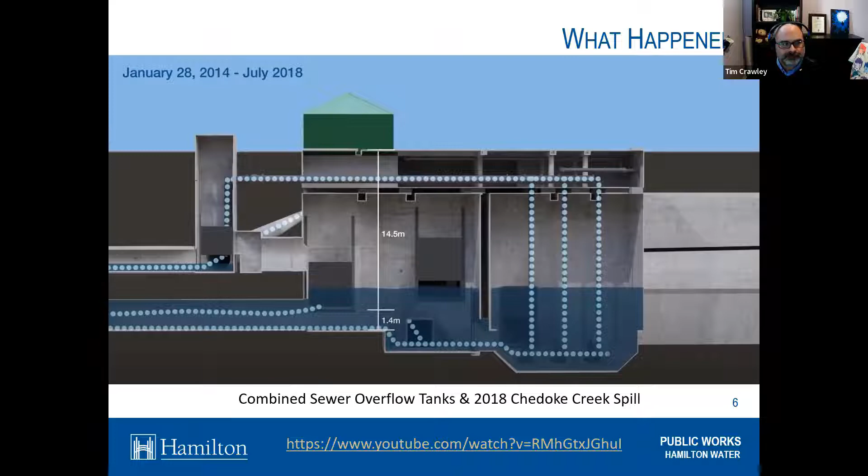So what happened? If you search combined sewer overflow tank in the 2018 Chedoke Creek spill on YouTube, you'll find a great 12-minute video. It explains a lot, especially how a combined sewer overflow works and what happened. For those interested, we encourage you to watch the video in its entirety. For now, we want to show you a portion of it for some context on the upcoming slides.

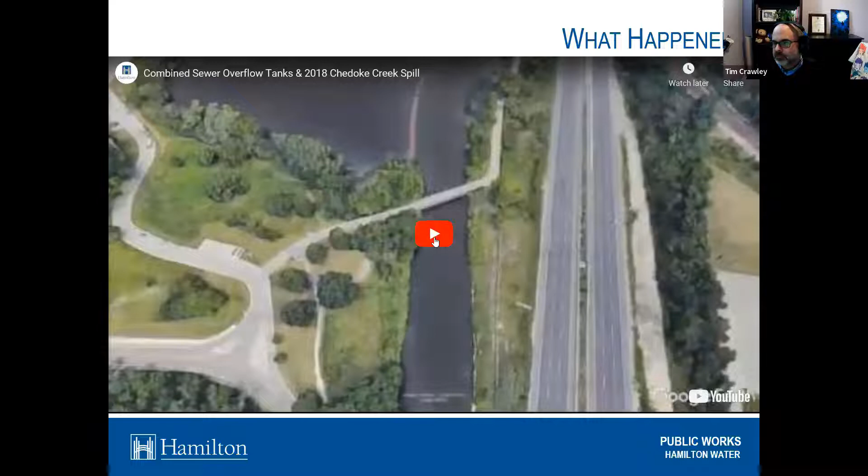In July 2018, the City of Hamilton informed the public that we had discovered that the Main King CSO tank was discharging untreated wastewater into Chedoke Creek. At the time of this public notification, the duration and volume of the spill were unknown. We immediately stopped the discharge and began cleanup activities in the area.

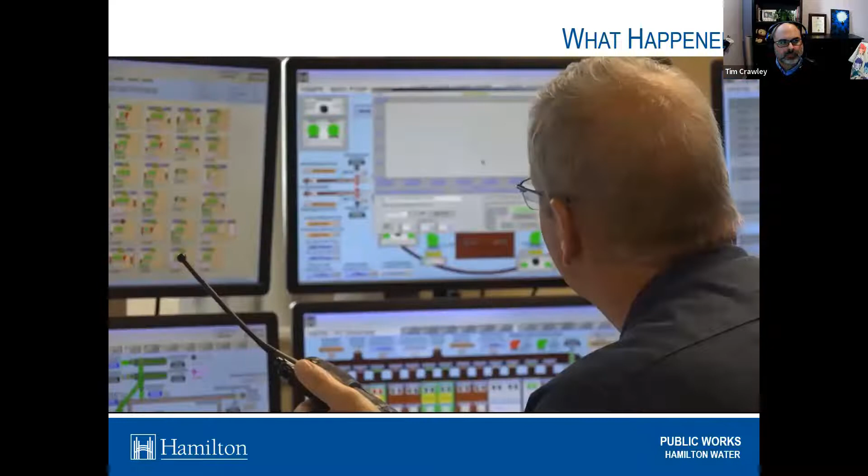Since discovering the spill in July 2018, we have been working with the Ministry of the Environment, Conservation and Parks to investigate the incident. As this investigation was ongoing, the city had not previously shared detailed information about the spill. However, this video includes a brief summary of what staff currently believe are the circumstances that led to the discharge. Investigations have determined that the spill was a result of two separate malfunctions at the Main King CSO tank.

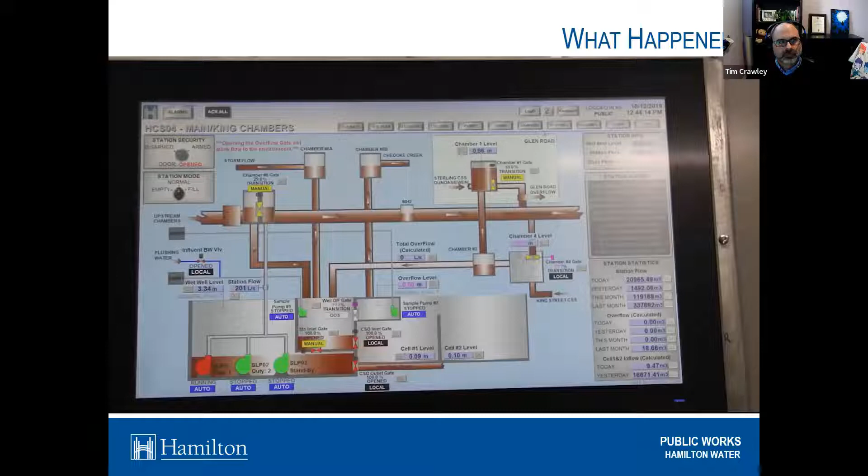First, a station bypass gate in the tank that should have been in the closed position appears to have been manually opened to approximately 5% on January 28, 2014. An error in computer programming showed this as normal operation, and as such, this error remained undetected until July 2018. This gate is approximately 14.5 meters below ground.

Its purpose is to isolate wastewater flow in order for the tank to be taken offline to perform major repairs. The gate itself sits 1.4 meters above the bottom of the channel where wastewater enters the Main King CSO tank. Wastewater flow would have generally stayed below the open gate. However, at times wastewater passed through the partially open gate and out into the creek. Despite extensive investigations, the city has not been able to determine why the gate had been opened in January 2014.

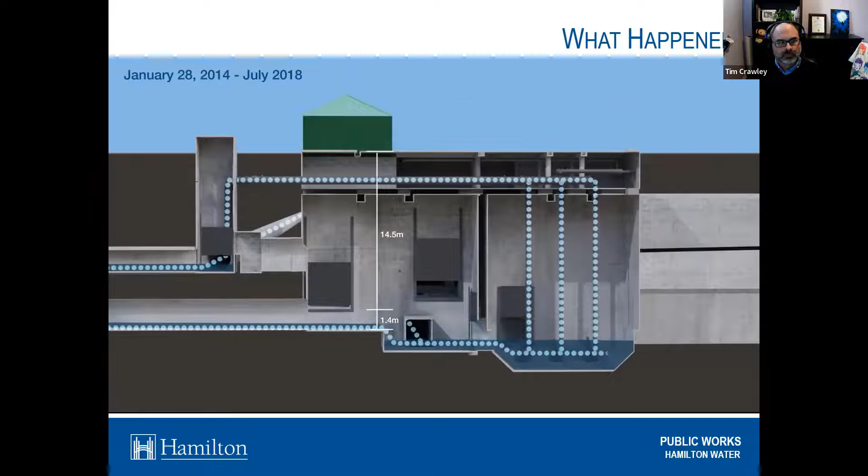A second gate that should have remained in the open position during normal operation experienced a mechanical failure in January 2018. This was also discovered by the city in July 2018. The sensor on this piece of equipment did not detect the mechanical failure and was reporting normal operation. This gate moves vertically up and down on a stem, and the sensor for it is attached to the mechanism that raises it up and down.

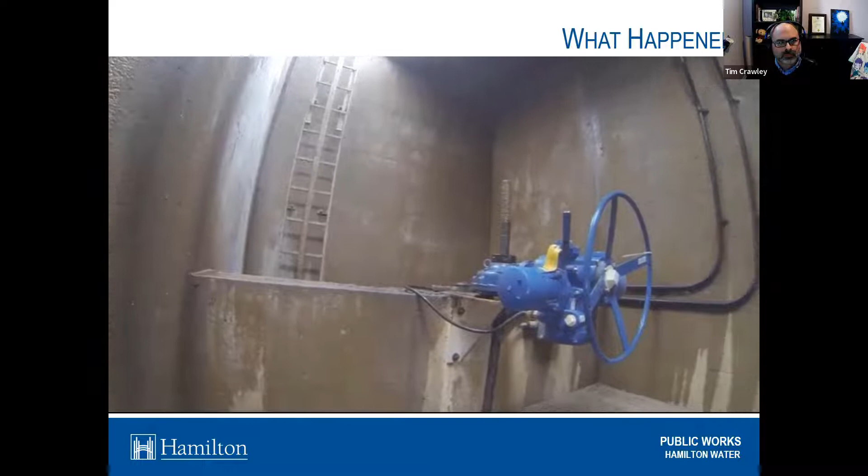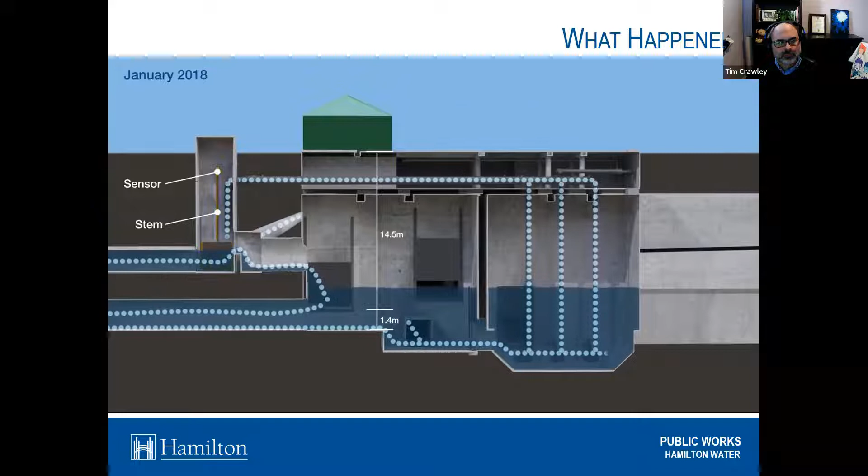As a result of the mechanical failure, the gate became separated from the stem and remained in the closed position. However, since the mechanism with the sensor was still moving, it was reporting normal operation. This second failure allowed significantly more wastewater into Chedoke Creek, creating odors and reports of visual floatables in the creek.

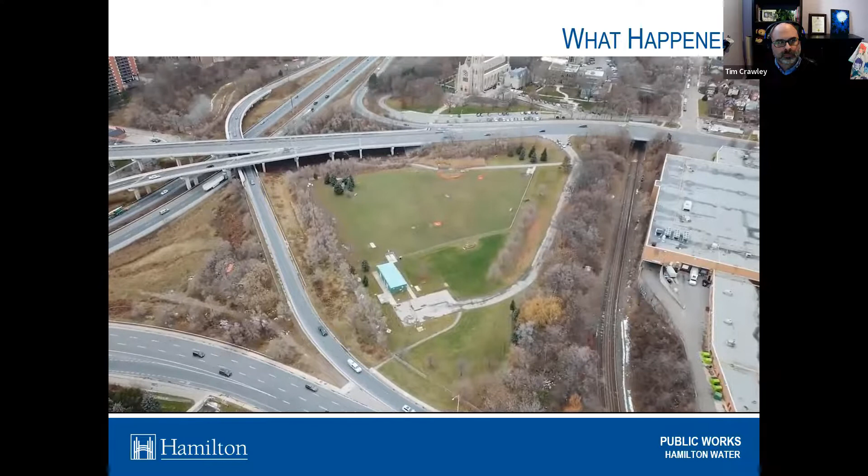As part of the investigation, the city has completed computer modeling exercises to estimate the amount of wastewater that was released into the creek. It was estimated that approximately 24 billion liters of stormwater and sanitary sewage was discharged over the course of 4.5 years.

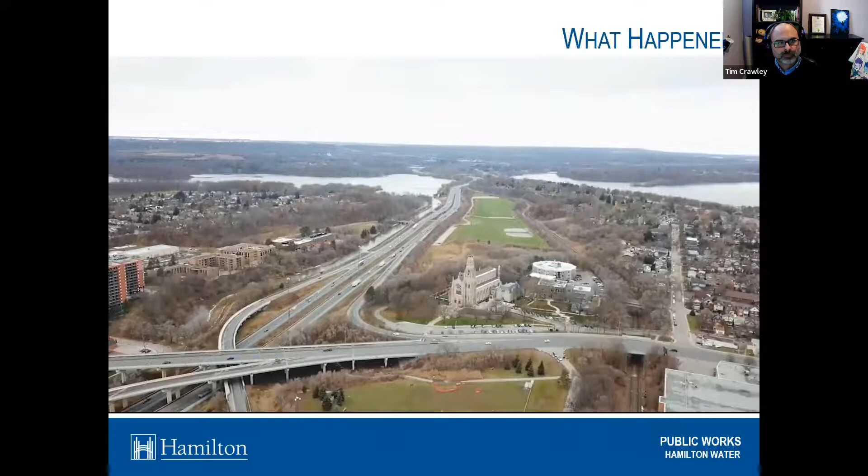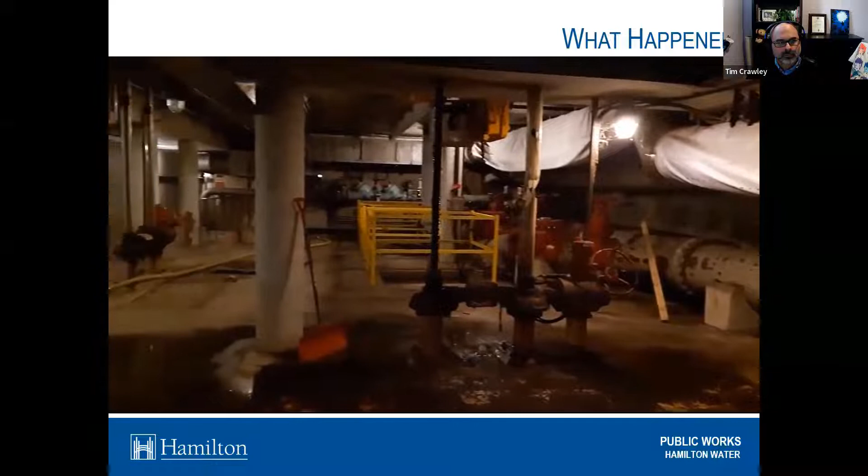Unfortunately, our investigation to date has not been able to pinpoint the cause of the malfunction with certainty. However, we are taking steps to ensure we are able to reduce the risk of spills like this from happening again by reviewing our procedures and improving on-site inspections of our CSO and other wastewater facilities. As stewards of the environment, we take spills very seriously and are committed to protecting our natural resources.

At this time, the city is continuing to work with the Ministry of the Environment, Conservation and Parks in their investigation. There is no evidence of any human health effects identified as resulting from this spill. The city discovered the source of the spill on July 18, 2018. There was no knowledge of the spill at any time prior to July 2018.

Within only a few weeks of locating and stopping the discharge, water quality sampling results showed a substantial improvement in water quality conditions, associated with a dramatic decrease in E. coli to pre-spill levels. For many years, Public Health Services continues to recommend against using the watercourses linked to Chedoke Creek for primary contact recreational water activities, such as swimming or wading, or secondary contact recreational water activities, such as canoeing or fishing. As such, signs warning against any contact with those waterways are expected to remain in place indefinitely.

The spill had no impact on the drinking water supply in Hamilton, as Lake Ontario is the source of our drinking water.

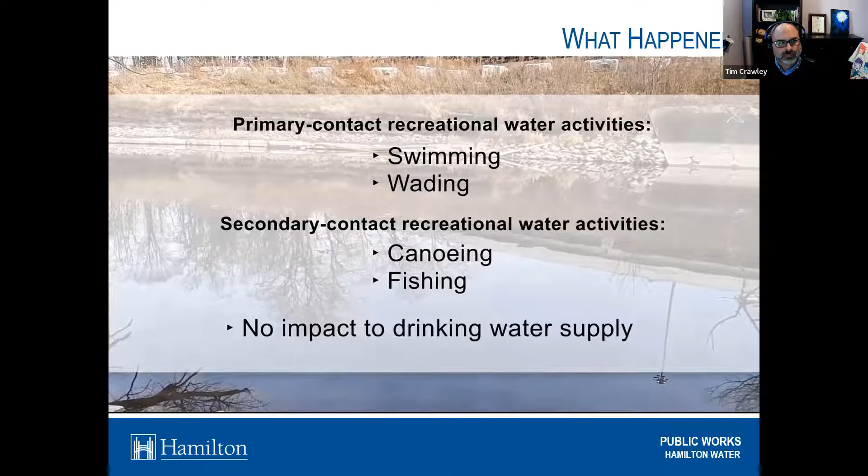So up next are the city actions from the discovery up until the beginning of 2021. This includes operational, procedural, and physical changes that were done.

The first of which is the bypass gate was physically sealed, preventing any accidental operation and eliminating any unintended discharge. The second gate and stem sensor was also reconnected, and site inspections at all the combined sewer overflow facilities have also been completed with no similar issues identified.

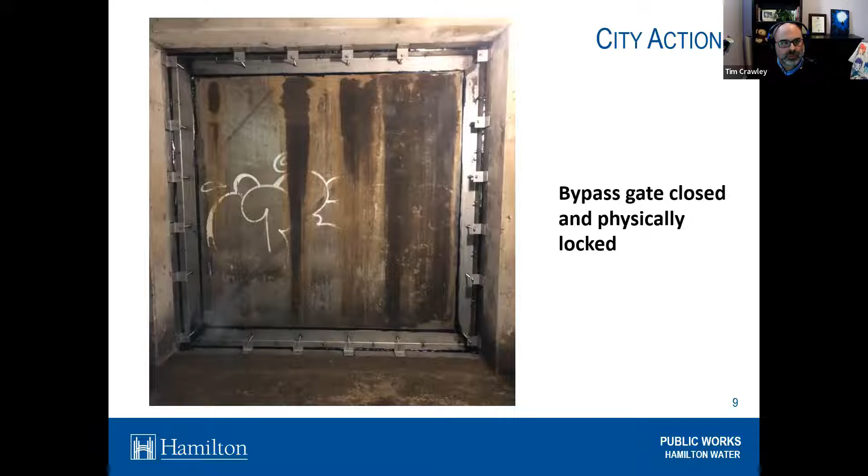The surface of the creek was also cleaned. A boom is also installed annually from April to November to collect any floatables, not just from the CSO overflow, but from upstream creek inputs as well.

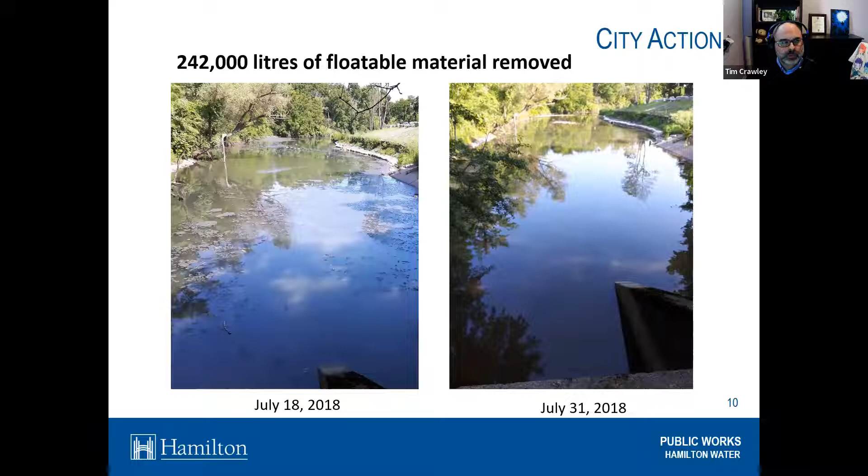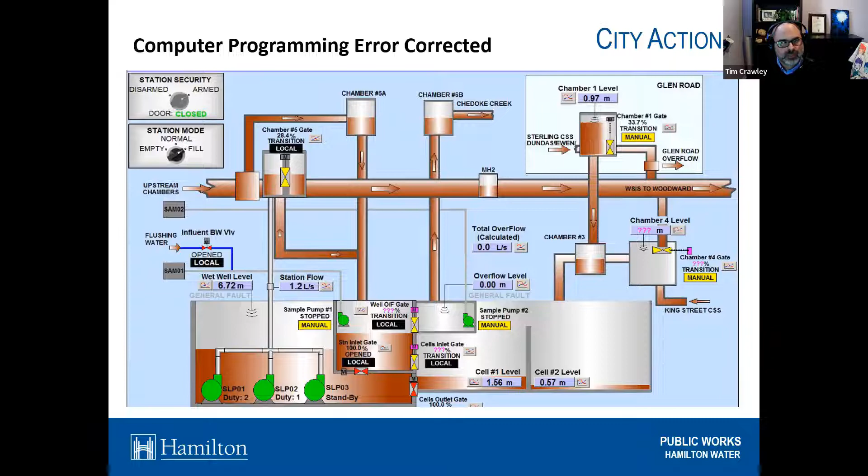The error in computer programming was fixed. This is a screenshot of what the operator sees on their computer screens. You can see the pumps and the valves and the transmitters. And this is an example of an error message that they would get, or a pop-up warning them that something's awry.

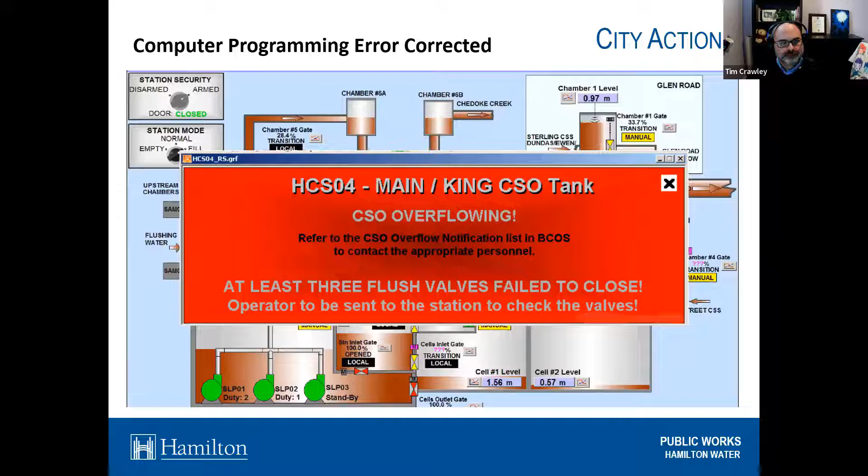We also created an enhanced City of Hamilton outstation team. This team is made up of an operator, electrician, instrumentation tech, millwright, and they perform inspections and look at the station as a whole to verify its operational functionality. This includes a detailed review of the electrical, mechanical, instrumentation, controls documents, which we'll get to shortly, and computer programming.

We also updated our controls documents and enhanced operator training. So controls documents, if you're not familiar, is really a document that describes how the CSO facility or tank works in a written format, and it's very important for training new staff.

We also developed and rolled out our wastewater quality management system. So having records and logs and annual reports adds to better management and is the key component to our continuous improvement. And it supports the environmental, health, and safety compliance culture within Hamilton Water.

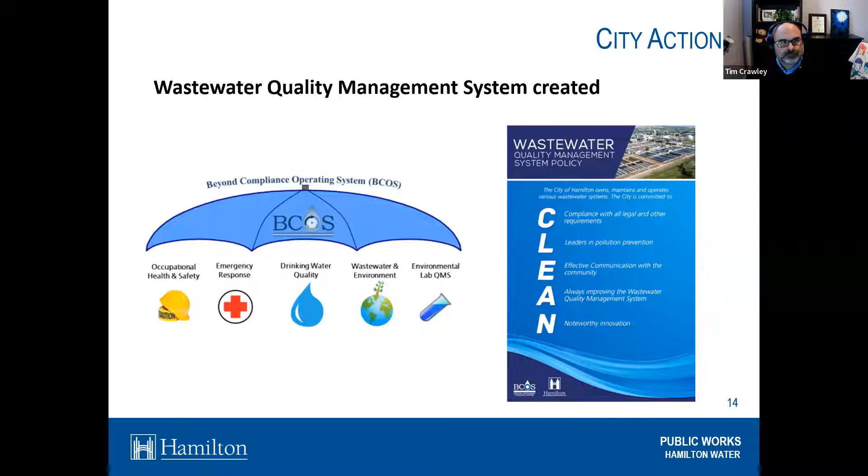The wastewater overflows and bypasses monitoring website was also created. It's a live map updated every 15 minutes, providing current information for each monitored outfall. It also includes historic records as well.

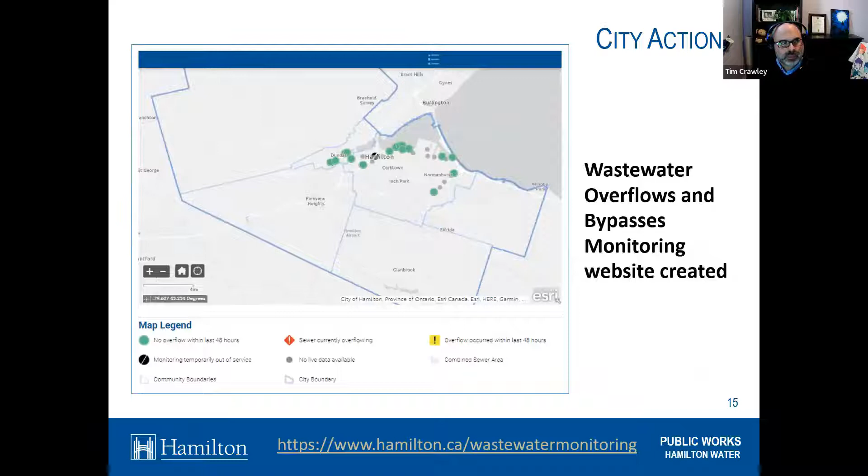And we developed a surface water quality program that samples surface water locations monthly throughout the city. The purpose of this program is to work with internal and external stakeholders to develop and monitor baseline surface water quality conditions. The information is provided through the Open Hamilton data portal for monitoring, trending, and research purposes. A list of all the physical and chemical parameters tested are indicated on the website below.

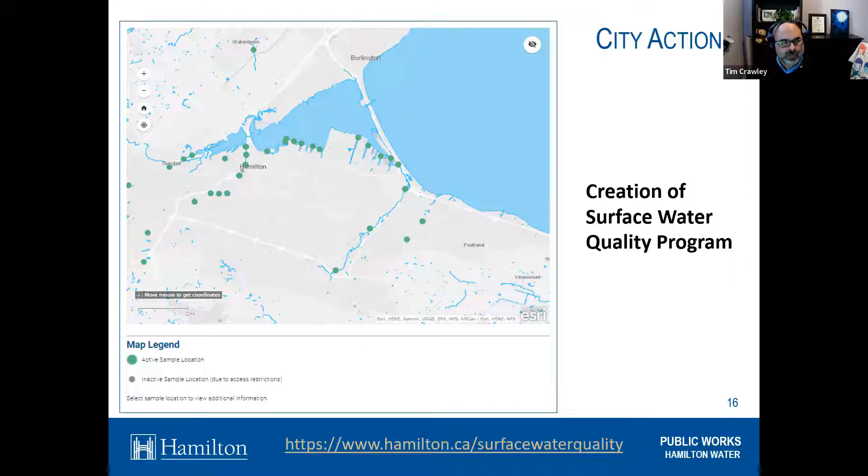In addition to all those actions, the city also initiated the Chedoke Creek Water Quality Framework Study. This study involved a high-level screening and prioritization of the available options for the Chedoke Creek watershed. This involves either capital, operational and maintenance costs, or programs that can be enhanced, and potential policies that can either be adapted to help the quantity and quality improvements within the watershed.

Established an overall plan for water quality, and it's developed through the participation of these external stakeholders. Since the initiation of the study came before the current MECP order, certain projects identified in this study were used to address requirements within the order.

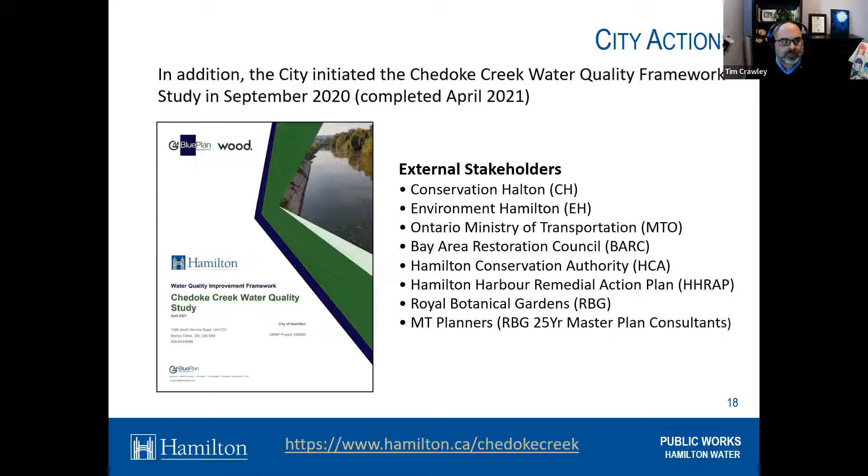So speaking of which, this brings us to the main focus of today's presentation, which is the current MECP order issued to the city in December of 2020. In the following slides, we'll be reviewing what has been done since the order was issued and the next steps.

So the objective of the order is to improve Chedoke Creek and provide offsetting remediation mitigation measures to account for environmental impacts that may not be addressed by dredging alone.

While working through the order requirements, the project team evaluated and received permitting approvals from the Hamilton Conservation Authority and the Royal Botanical Gardens to install a small-scale aeration system within Chedoke Creek, upstream of the Kay Drage Park Bridge, and 800 square feet of floating treatment wetlands within Princess Point.

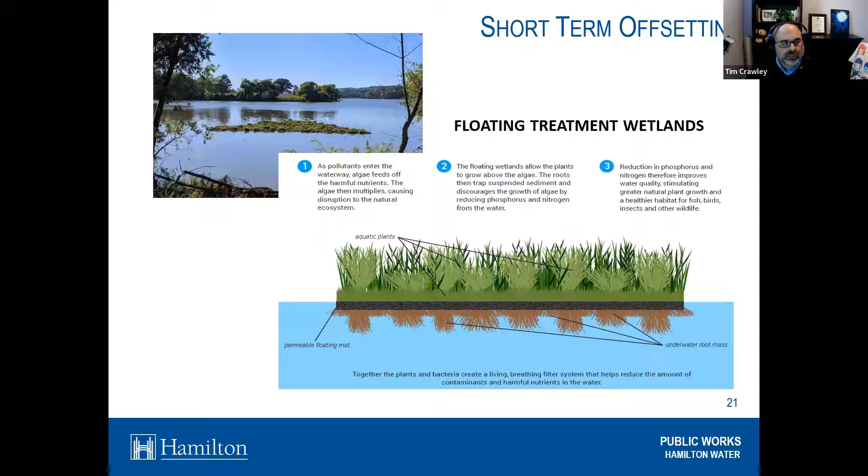Both small offsetting projects are pilots, or small tests, to learn more about any operational and maintenance requirements and explore the benefits each one has to offer, and not really exclusively to solve any specific issue at this moment in time.

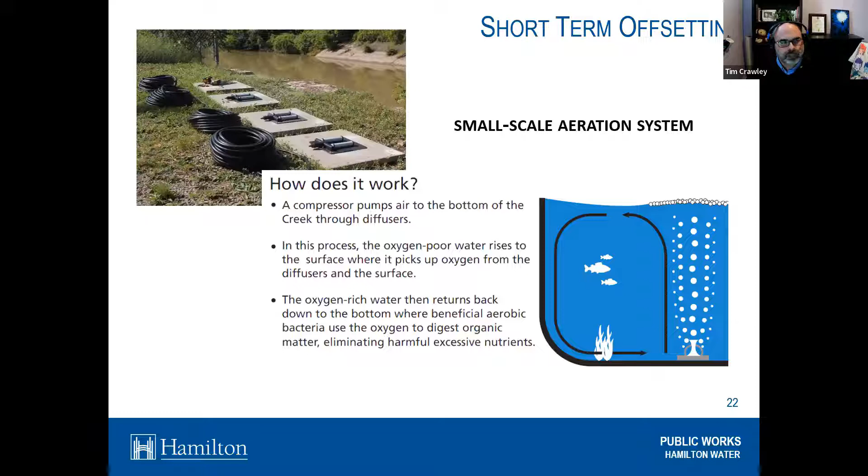Due to the fish species identified in Chedoke Creek, in-water work is prohibited from March 15th to July 15th each year. The project is expected to take 4 to 5 months to complete, and most of the permitting applications required to do this in-water targeted dredging work required at least a 90% design package to be completed.

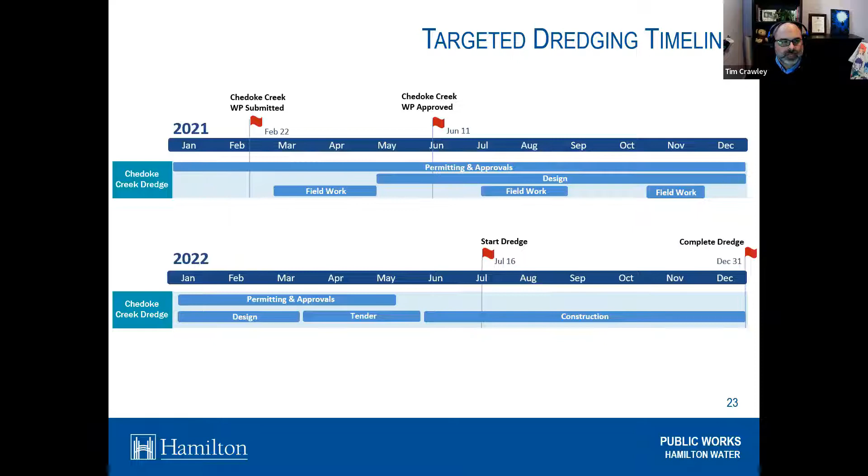This was needed in order for those agencies to have sufficient project detail to assess their permitting requirements and to either approve or deny the permitting. In order to complete that 90% design package, field work and desktop analysis was completed, which is presented on the following slides.

The first of which is sediment sampling and bathymetry. This involves collecting and updating information on the total soft sediment that is required for design and permitting. The bathymetry looks at the total water depth, so the top of the water to the top of the sediment. The sediment samples collected were analyzed for a variety of chemical and physical properties, including ammonia, nitrogen, and phosphorus.

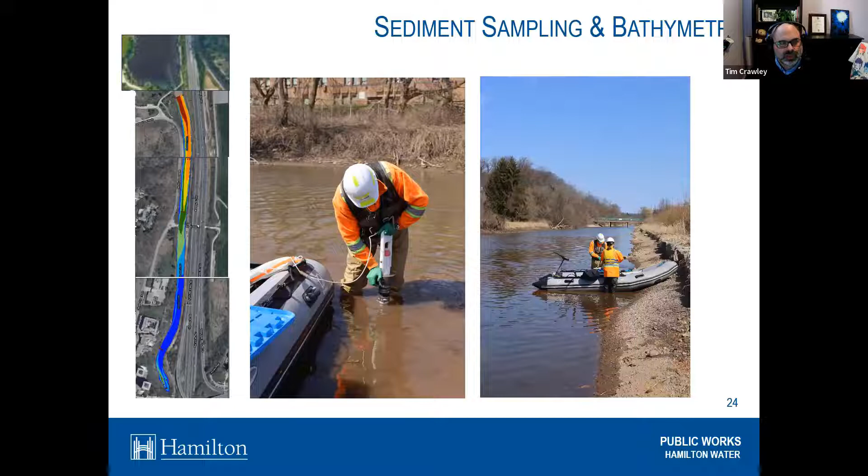The samples were taken every 50 meters, left, right, and center of the creek. Then every 15 centimeters of each sediment core was averaged, and the concentrations compared to 2 quality guidelines: the provincial sediment quality guideline and the Canadian sediment quality guideline.

Topography, which looks at the forms and features of the land surfaces, was also done via a drone Lidar system. For those that aren't familiar, if you think of bats or subs, they use sonar, or sound, to ping. The Lidar uses light to transfer from the drone down to the land and then back up again.

Some advantages of using a drone Lidar system are that it's more efficient for capturing this data and coverage compared to a walking or land-based survey. The topography was also tied to the bathymetry and the sediment sampling, and that whole package provided the basis for the estimation of the amount of sediment to be removed.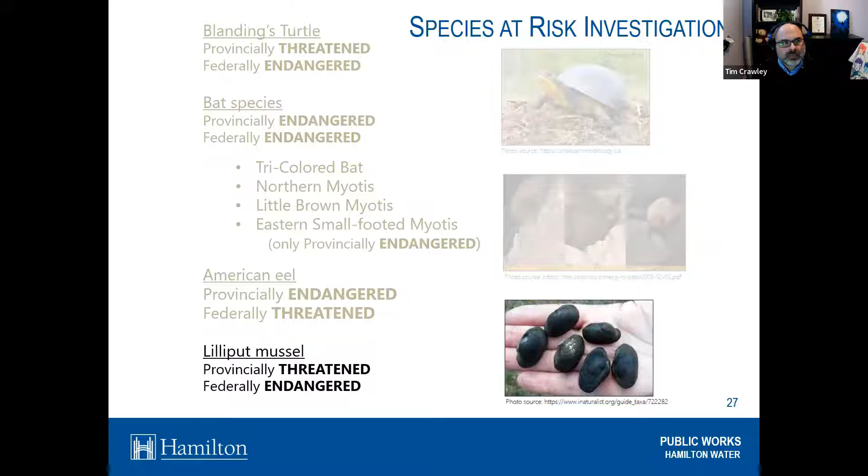Based on those investigations, the only species at risk that has the potential to be in the area is the Lilliput mussel. This species only moves about 4 meters in their life, and the work area will be searched prior to dredging.

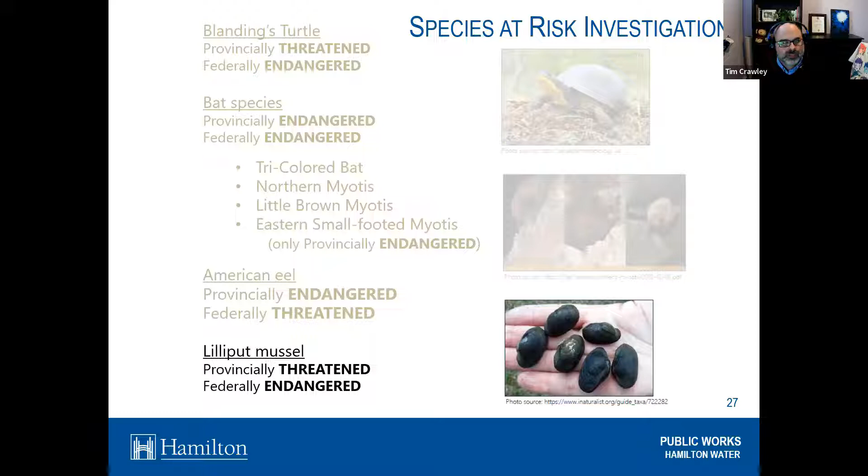Whether they are found or not, permitting also includes adding habitat enhancements for this species in a nearby known Lilliput mussel location within Cootes Paradise.

The hydrologic and hydraulic computer modeling simulated the flow of rainfall runoff to predict the extent of creek water levels. It provides a scientific approach to planning, designing, and construction of this restoration project. The modeling also satisfies the regulatory requirements and ensures that the natural and social resources are not damaged by the proposed dredging.

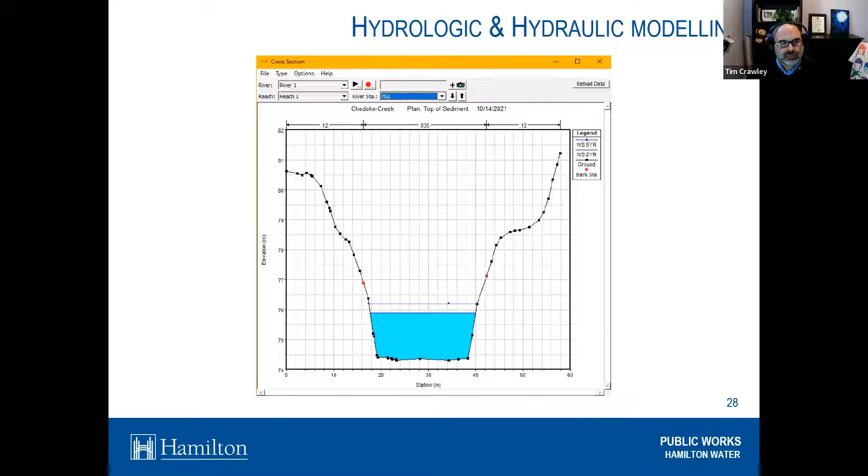In addition to all that work required for permitting, we also pre-qualified 4 contractors. Those 4 contractors are the only ones that will be bidding on the project that is currently open right now. We also completed the 100% design in order for those contractors to bid.

We continue to engage our Indigenous Nation partners, and we're in the midst of the tendering of the projects, with the tendering closing next week.

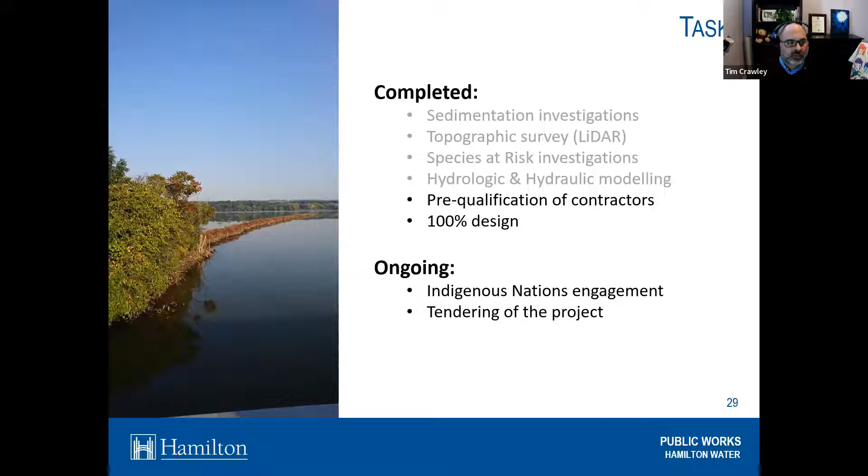Here's an overview of all the necessary permits for the targeted dredging within Chedoke Creek. We only have 1 pending, and it is expected any day now.

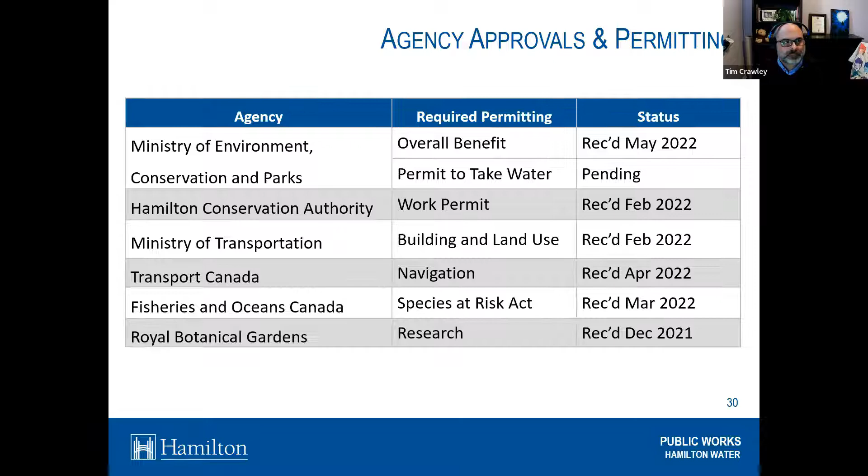The sediment quality samples were collected at numerous locations in Chedoke Creek and Princess Point in April and August. As previously discussed, this resulted in the project area being 100 meters south of Kay Drage Park Bridge, extending about 100 meters north of the Desjardins Recreational Trail Bridge. We've further divided it into 2 zones, a north and a south zone. We will dredge to an average depth between the 2 zones of about 1 meter down.

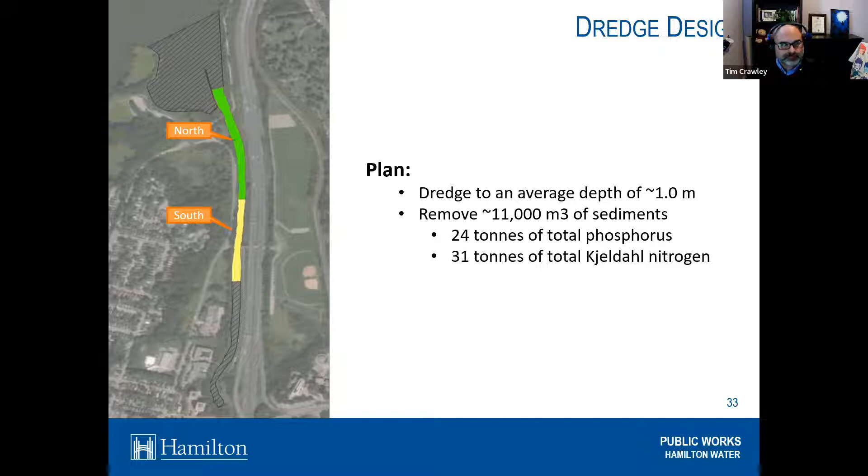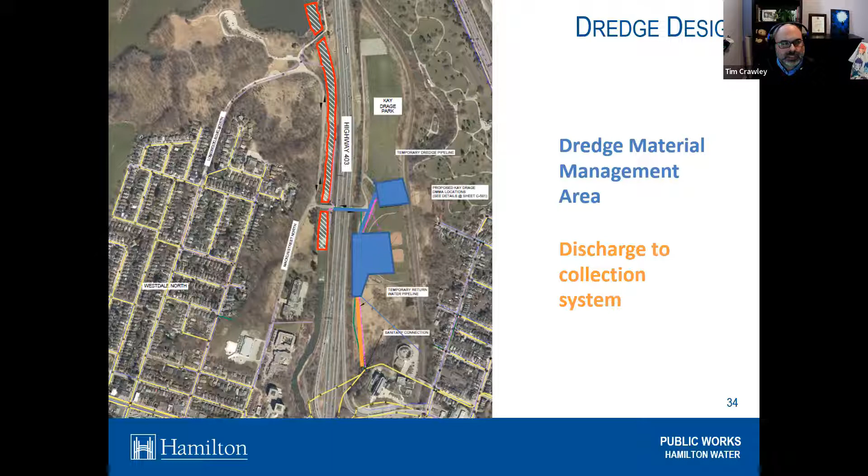And we will remove approximately 11,000 cubic meters of sediment. So here's an overview of that same project area, lumped together as one area. The dewatering, or separating the liquids and solids, will occur in the dredge material management area. More on that in a moment. The separated water will be sent to the Woodward wastewater treatment plant for treatment on dry days only. This stipulation is meant to stop any potential other CSO overflow event on wet days as the water makes its way to Woodward.

So the dredging will be conducted hydraulically. This means we will be vacuuming up the sediments or solids from the bottom of the creek, similar to if you're familiar with Randle Reef. Prior to dredging activities, the in-water work area will be isolated using a barrier, and fish and wildlife will be excluded from the work area prior to dredging by a qualified aquatic biologist. This mitigates any potential interaction with the dredging operations.

Permitting also requires that the creek flow remain unimpeded, so each zone will be broken down into smaller isolated sections covering only half the creek.

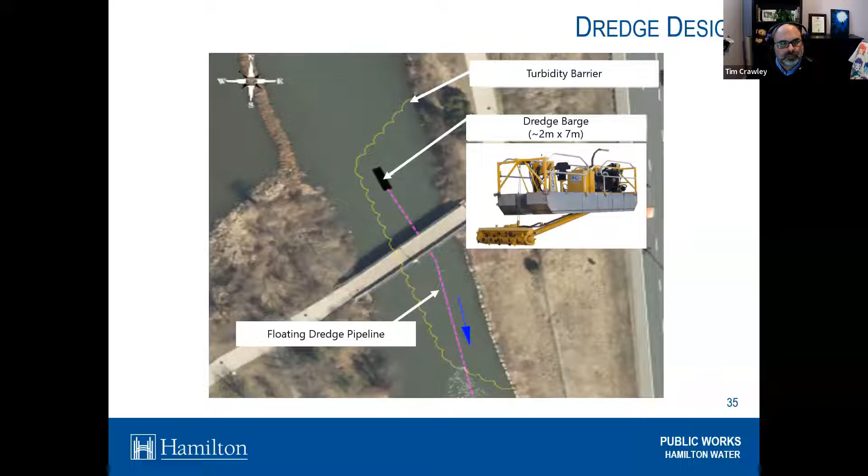Back to dewatering, or removing the water from the solids. Here's the process flow. What happens is we will pump the slurry, which is the vacuumed solids mixed with the water in the creek, into a geotextile container, while environmentally safe polymers are added to make the solids bind together. The water then simply drains from the container while the solids are captured inside.

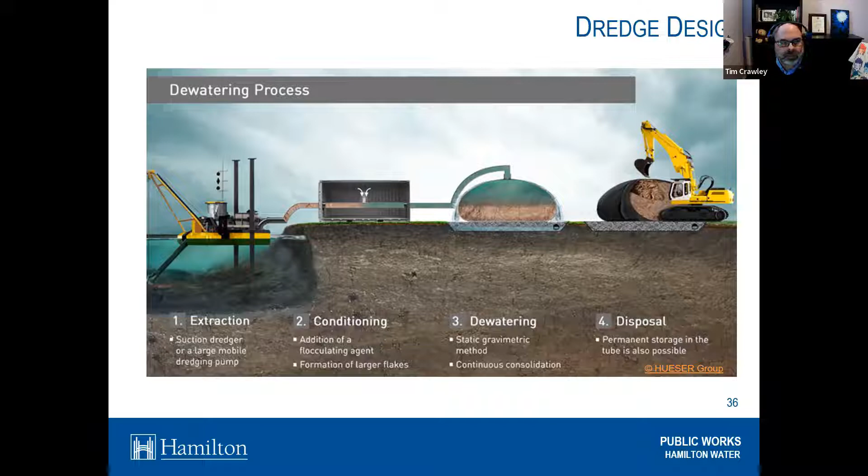All that water is then captured and sent to the sewer main, again on dry days only, while the solids remain in the container. And then when it's full and dry, the container is cut open and the solids are trucked away to a landfill. But here's a quick picture of a geotextile container, and I'll do my best to explain it in simple terms.

Really, the way I think of it is it's like a sock. So the slurry goes into the sock, only water can get out of the sock, and the solids stay inside. So that happens until the sock is full of solids and there's no more room for water. All the water has left, and then it's dried a little bit and then cut open and hauled away.

So all the water from that sock falls on an impermeable membrane. The whole work area will have a membrane laid out so that the water can't penetrate the ground. All the water will stay on that membrane, and it will be collected and then piped to the manhole.

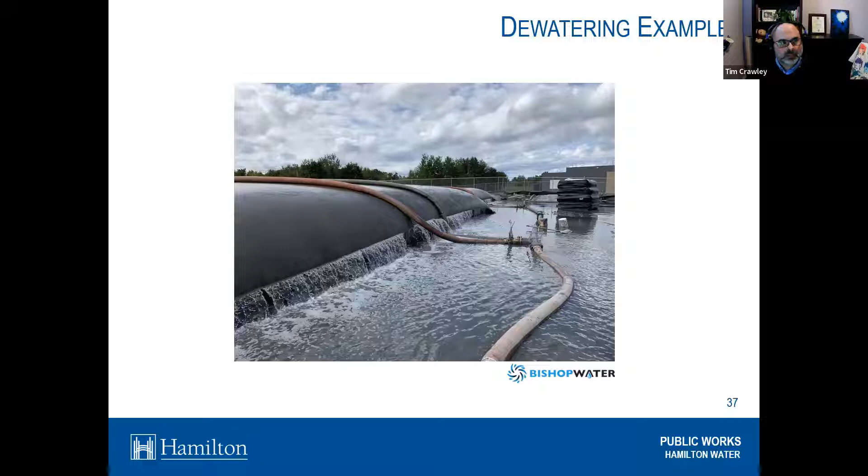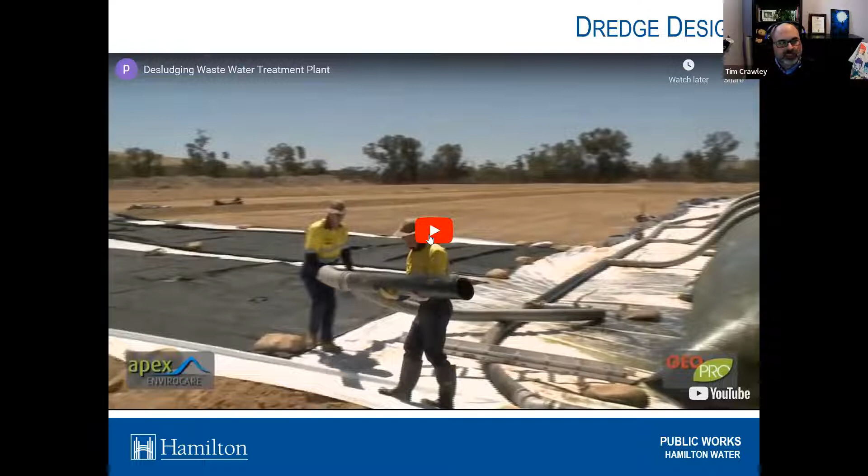So here in this video that you'll see, it explains the process. It is just an example. Our process will have slight differences, but I think it's really important or valuable for you to see it in action versus just slides of the process.

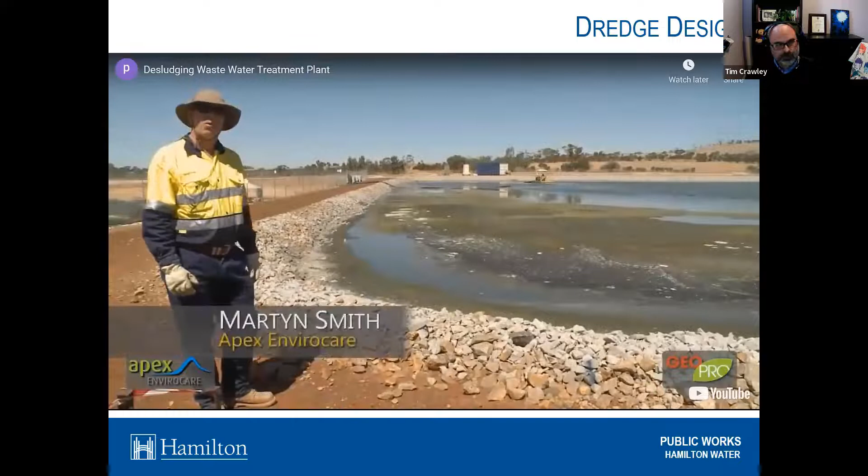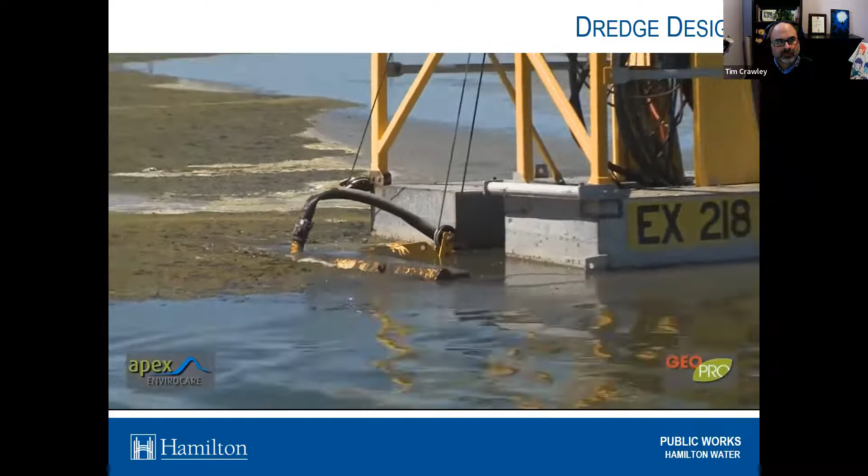The depth of the pond is about 1.5 meters, and we're looking to remove at least 1 meter of that sludge. We have to cut it quite carefully to ensure that we have enough dilution water, so when the dredge comes forward, he won't be just taking a bite full of the solid sludge, he'll be trying to mix in water at the same time.

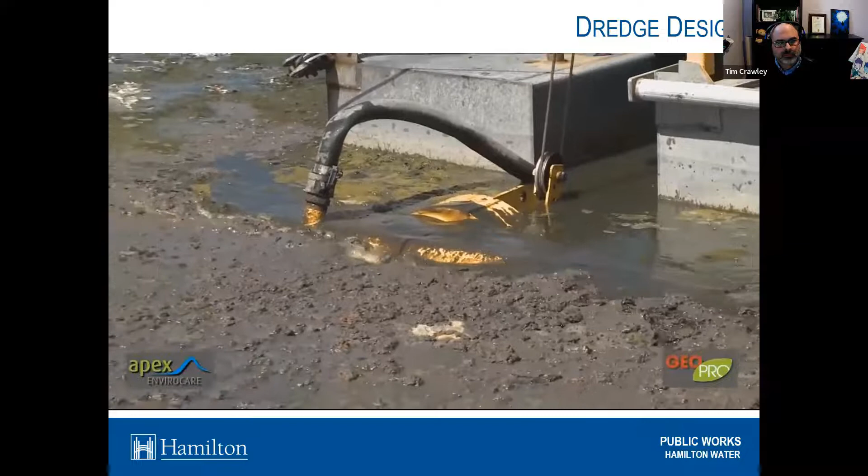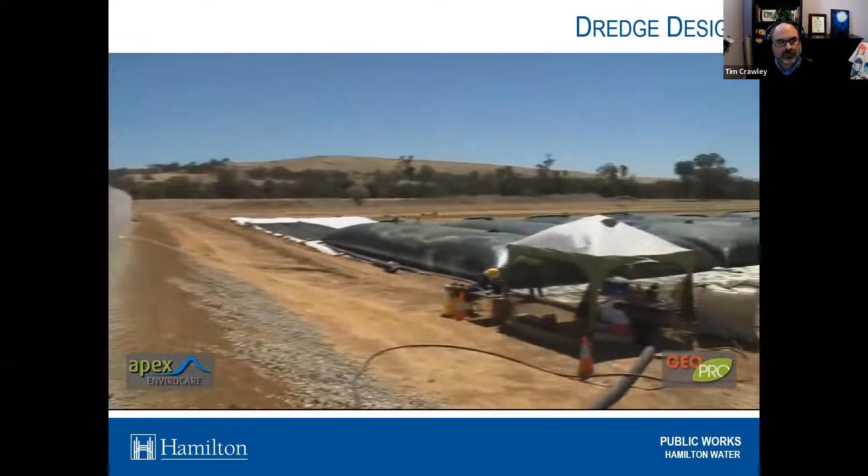The dredge sucks up the sludge from the base using the cutter head, removes it via the floating pipe through the on-ground pipework to the dosing tent where the appropriate polymer is added, and then it goes onward towards the tubes which dewater the sludge.

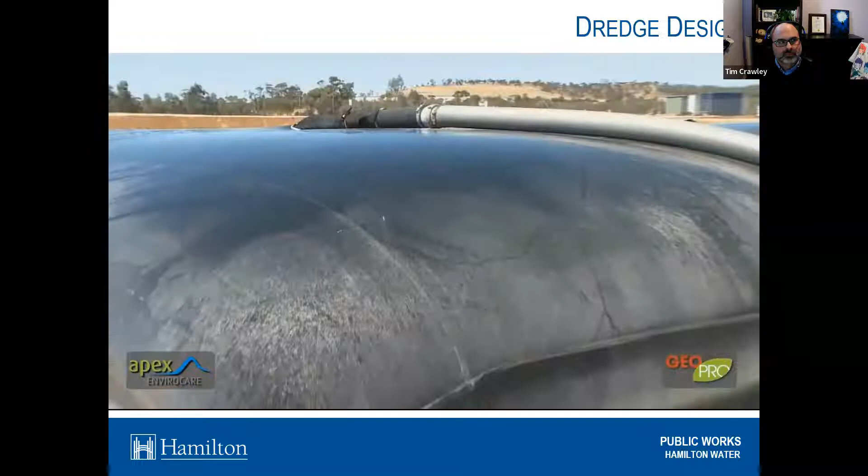Choosing the appropriate polymer is so important to the success of these projects. It can mean the difference between a tube full of water and a tube full of very dry solids. Once you've got it, you then have to make sure that you shear it into the pipeline.

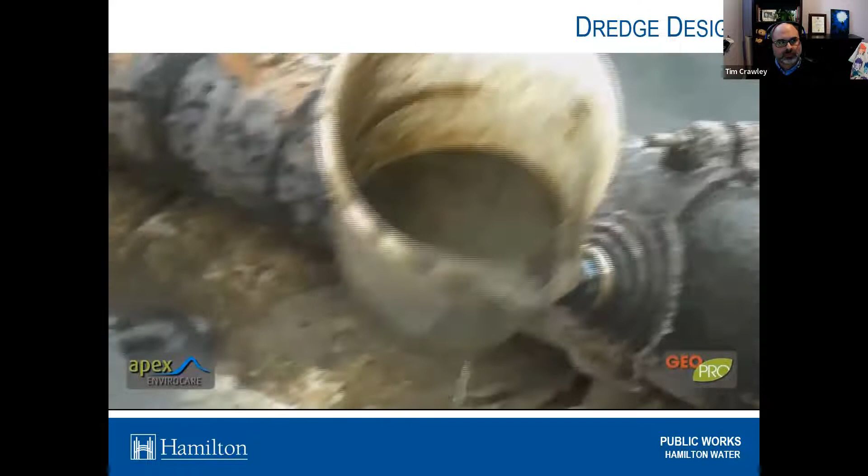This is a live sample from the dredge after it's been dosed with the polymer. We monitor this from time to time to see how well the sludge is being flocked by the polymer, whether there's appropriate dosage, and this material is going directly into the tubes.

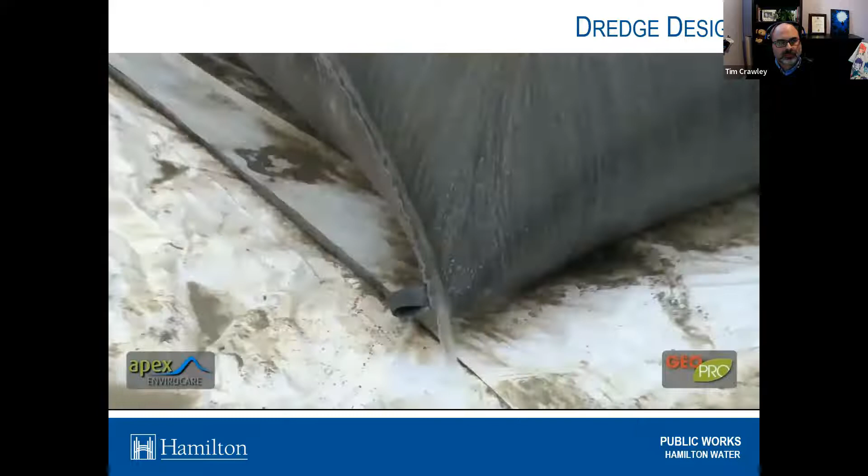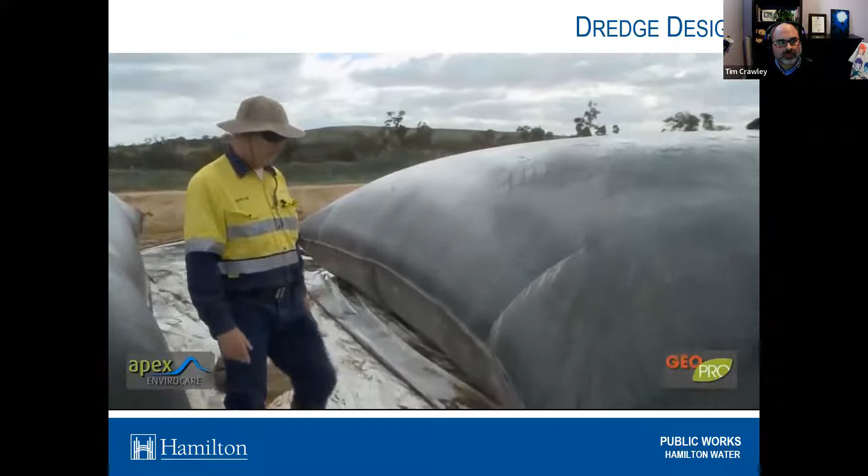So this is an older bag that's been pumped several times before, and we're just doing the final top up. You can see that with the appropriate dosing of the polymer, you can get a clear filtrate coming out here. The water is coming out very clear. Water tends to come out of the top of the tube, and as it comes out, it filters down to the seam and finds its way out.

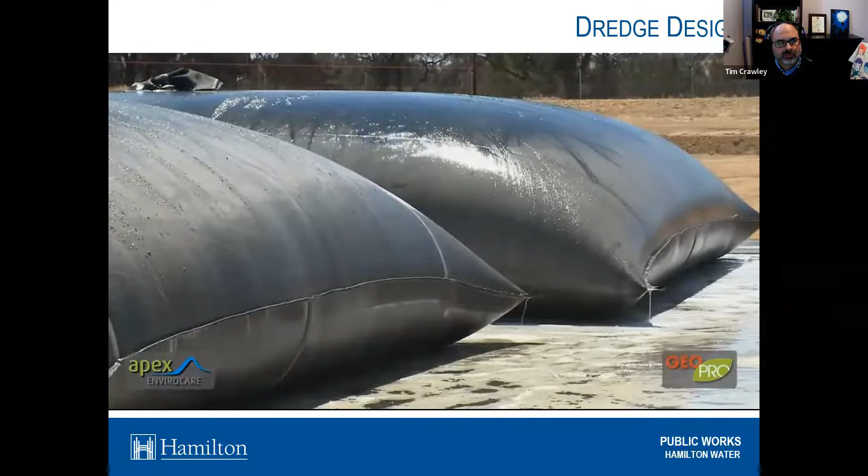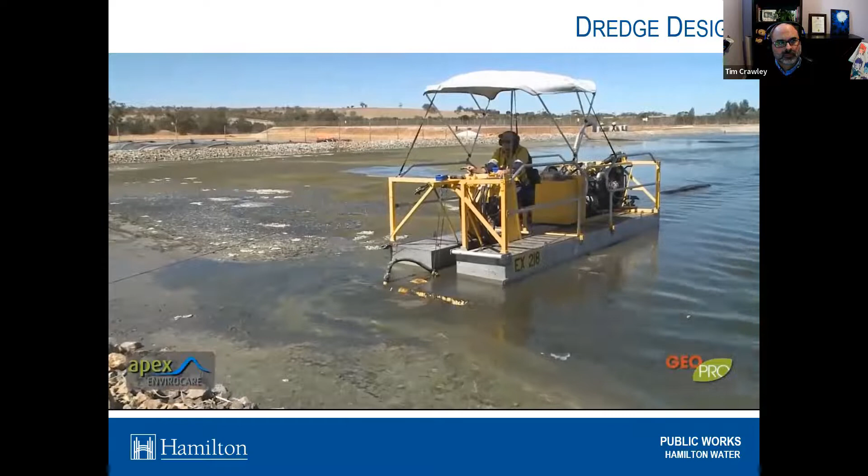The dredge is pumping at between 3,000 and 5,000 litres per minute, and the fabric, as it gets older, is more reluctant to release the water. Brad is just going to hit the bag to accelerate the water coming out. As the water starts to flow, you just get a clear filtrate coming out.

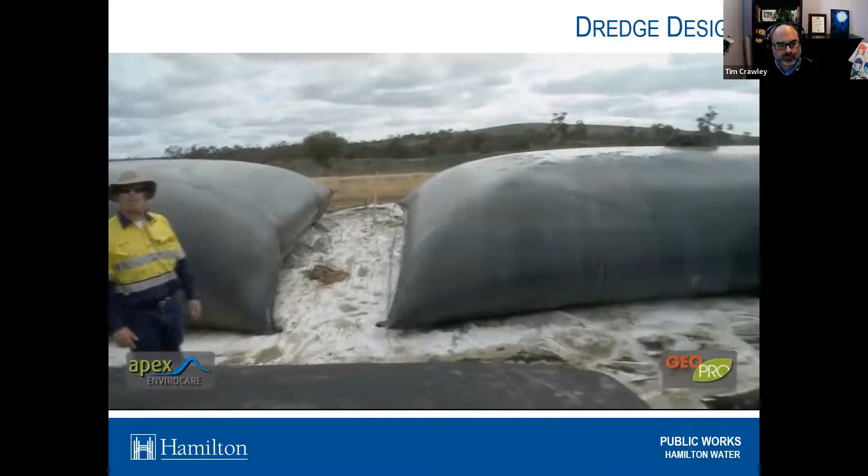Of course, the quicker we can get the water out of the tube, the better. It means we can get more sludge in, and more sludge means more tonnage of solids that we've got out of the pond. To look at this is fantastic compared to what we saw in Brad's jug earlier. That's the material that went in, and now we can see just how dry it is.

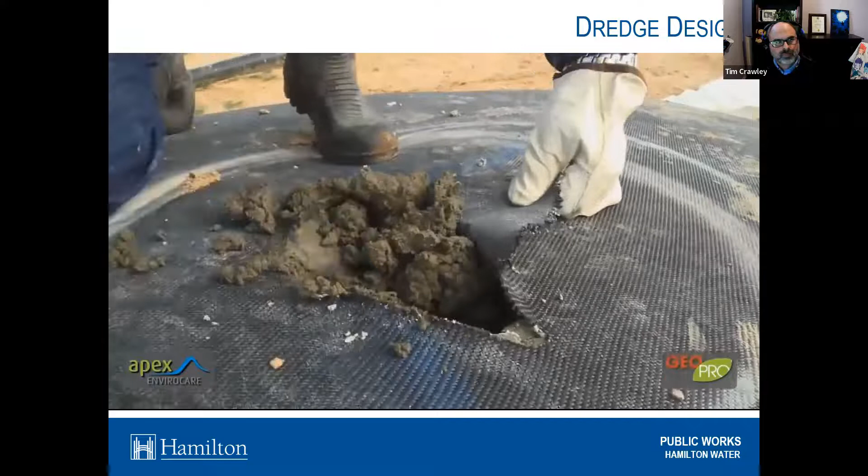This material will continue to dry as the tube ages, and the client may decide to leave this for several months before they get rid of it. It could be used for soil improvement, or if there are any contaminants, then it may have to go to landfill. So that's just an example. Again, I hope that helped.

Just leave it up for a little bit.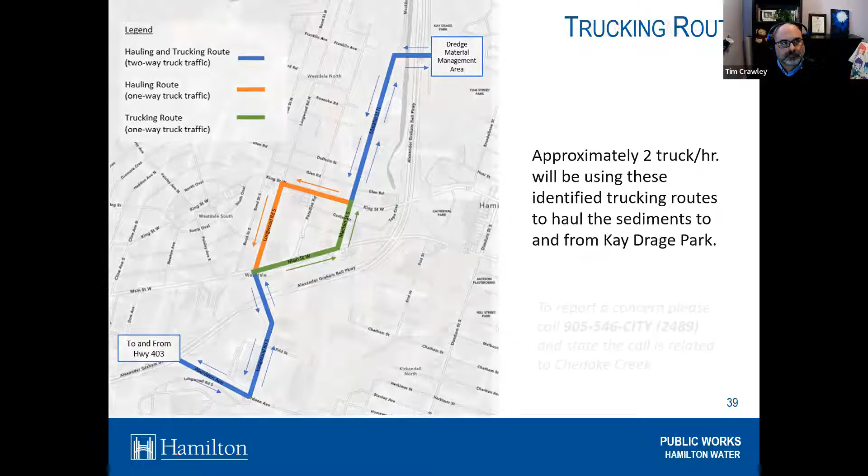For the local impacts, we'll just review the list of 7 identified impacts. So for odor, we don't expect any impact due to the dredging method. As you saw, it's hydraulic. Everything is contained within the pipeline, and the dewatering method is through those geotextile containers, those socks, keeping all the material contained.

However, we do have provisional odor mitigation tools that will be utilized should odors become a nuisance. For noise, again no expected impact due to the dredging and dewatering method, but should a concern arise, please report it to the number shown below and state that the call is related to Chedoke Creek.

For mud and dust, again no impact as there are requirements within the contract to street sweep, but should a concern arise, please again report it to the number below.

For bus traffic, again no expected impact as buses will be given priority on the trucking route.

For park closure, the Kay Drage Park will be closed for public access for the duration of the dredging activities. Starting sometime in June, the park will be used as a staging area for the dredge preparations and will be utilized throughout the project as the dredge material management area. Upon completion, the park will require restoration work. Therefore, it is expected that it will reopen to the public in the spring of 2023.

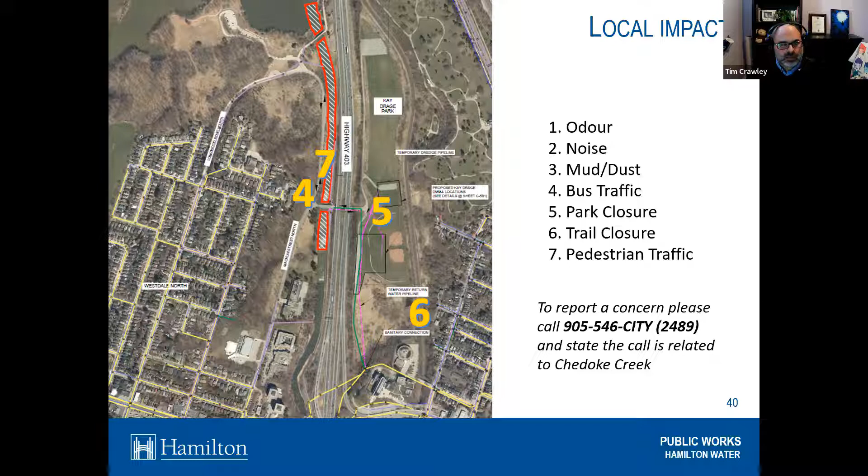So the targeted dredging next steps include continuing to execute the communications plan, with regular updates through our website and social media, and addressing any permitting requirements prior to in-water work. Most of the permits do have requirements that we do something before we're even allowed into the water, so those boxes have to be checked before we're allowed in. We're working through that.

And then we'll evaluate those bids and award the project to a successful contractor. Again, that RFT, or request for tender, closes next week.

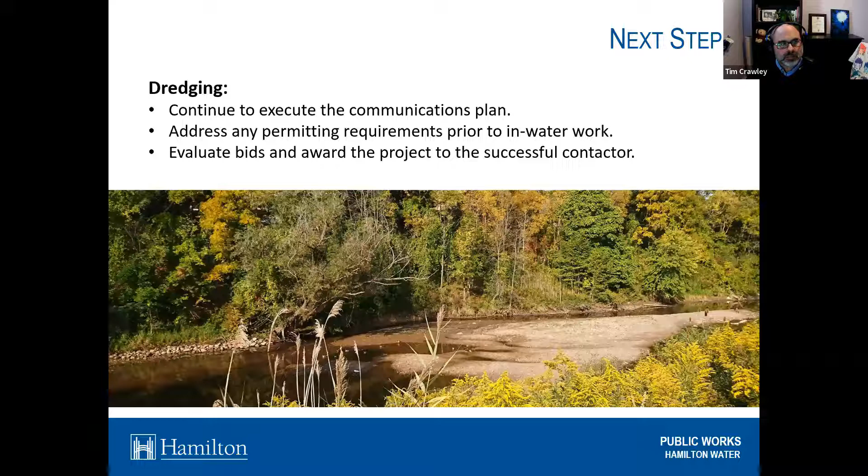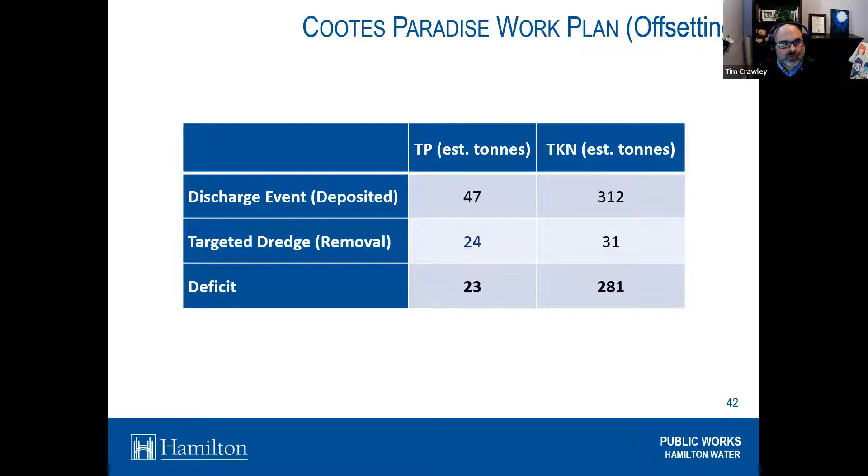So the first is a Stormwater Retrofit EA. This will focus on the quantity and quality improvements of stormwater runoff in the entire watershed.

Two other EAs are the Ainslie Wood Sewer Separation EA, which is looking at removing a creek input into our combined system and adding that flow back into the environment. And the Lower Chedoke Creek EA is looking at a variety of different options, including creek aeration, the naturalization, restoration of the delta into the Princess Point, abatement, among others.

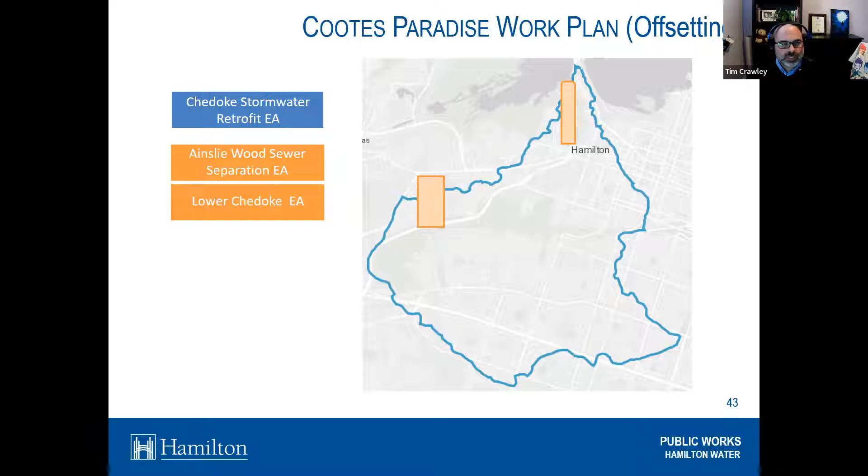Any alternatives that are identified will also be evaluated through additional fieldwork, analysis, and agency, stakeholder, public, and Indigenous engagement. The three EAs will be completed concurrently in 2022 and 2023, with the identified preferred projects advancing to design and construction thereafter.

Something else that we're working on is additional investigative studies in Cootes Paradise. The project team is working closely with RBG on defining the scope of this work and locations, and beginning field investigations shortly.

And lastly, our two citywide policies. We have a roads retrofit rehabilitation policy where we'll examine opportunities to provide stormwater management, quality and quantity improvements for rehabilitated or reconstructed roads to maximize runoff treatment. And the stormwater management policy will consist of updating the existing stormwater management policy for redevelopment sites, and will contain a prescription of best management practices, including low impact development measures within the city.

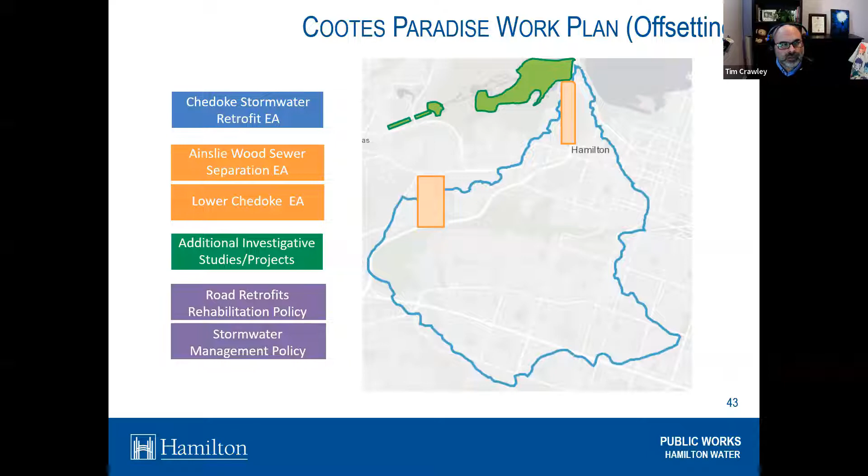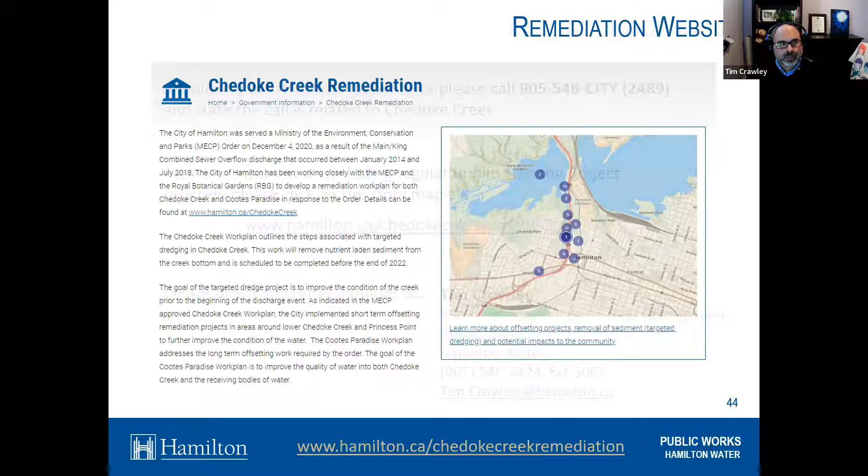Again, should anything not be addressed or anything out of the ordinary occur, please do call the number shown here and state that it's related to Chedoke Creek. For more information, please feel free to visit the website for those regular updates, and for any other inquiries, feel free to contact myself with the details shown here. And with that, I will open it up to questions.

Why is it falsely stated at the end of your video that the spill was unknown prior to July 18th, 2018? This is not correct, and both the city and the ministry know this to be incorrect. The sewage stream waste was known to be fouling the creek from at least spring 2018 on, and there was evidence brought specifically to Hamilton Water prior to this date, since 2015. Those reporting it were belittled, outwardly disbelieved, and treated with considerable hostility. Nick, I know you were not leading the group at that time, but are you able to speak to this misalignment of information that was presented at the end of the video and what we know to be presented elsewhere?

Yeah, absolutely, I'm happy to. Honestly, I can tell you we didn't know. I hope that doesn't ring hollow, but our commitment as operators of a water wastewater utility to the community and to the environment is extremely important. It's why people get into our business. We don't know each other, but I would ask you to trust that if we'd known something like this was going on, we would have reported it. We would have stopped it. There's no way we would have let it continue for years upon years.

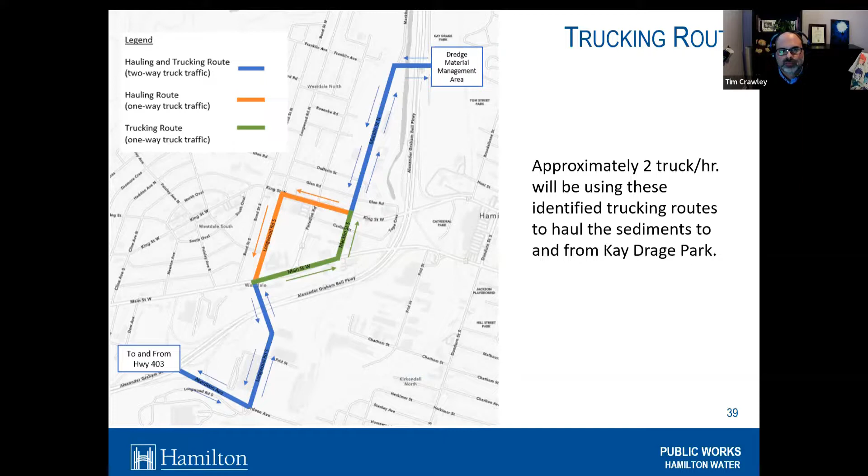We'll get that. Yeah, it is something that needs to be coordinated because that work is started and is expected to go to September. So we may want to have a conversation with those folks and we can double check that and put that information back out after. For sure.